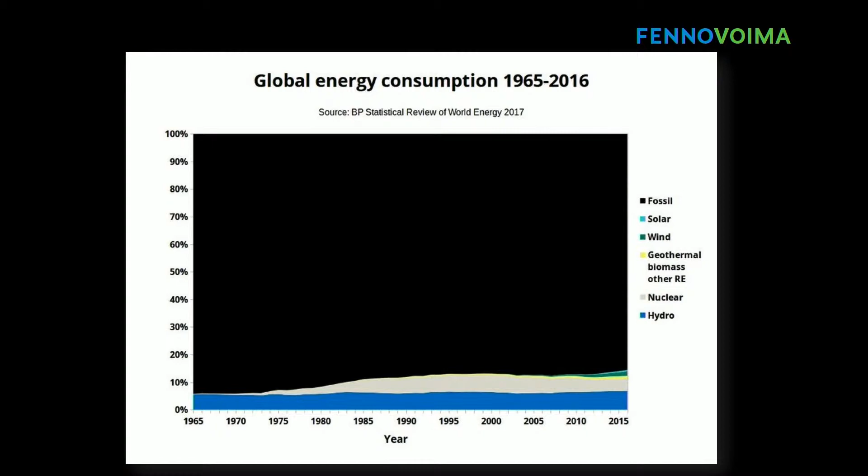Over the last 50 years, the global energy consumption relative trend looks rather sad. The black is really black - the black is fossil. The world's energy, not only electricity but all the different forms of energy we use in the world, is made out of fossil fuels, about 80%. The world-class challenge is to get rid of those fossil energy sources.

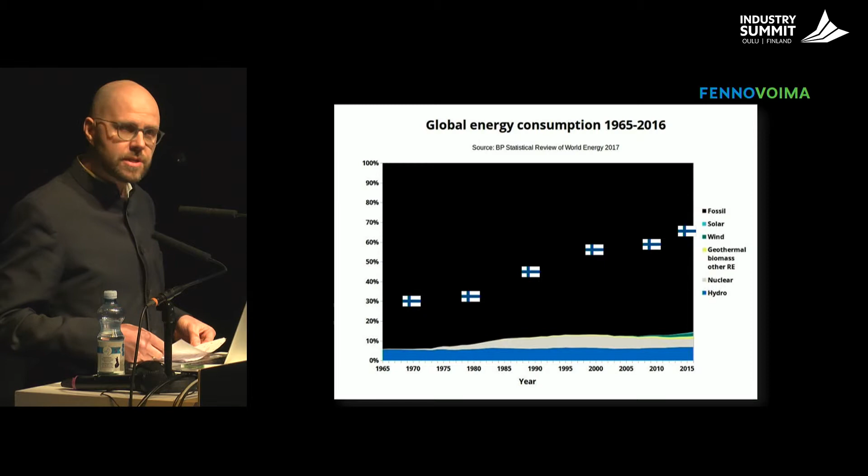But don't you worry, Finnish energy situation has been on a good development track. Here you can see the flags and the levels. We still have some problems with transportation, heating sector, electricity sector, and industry sector as well, in cleaning our energy systems. But the world has much bigger problems than us in Finland.

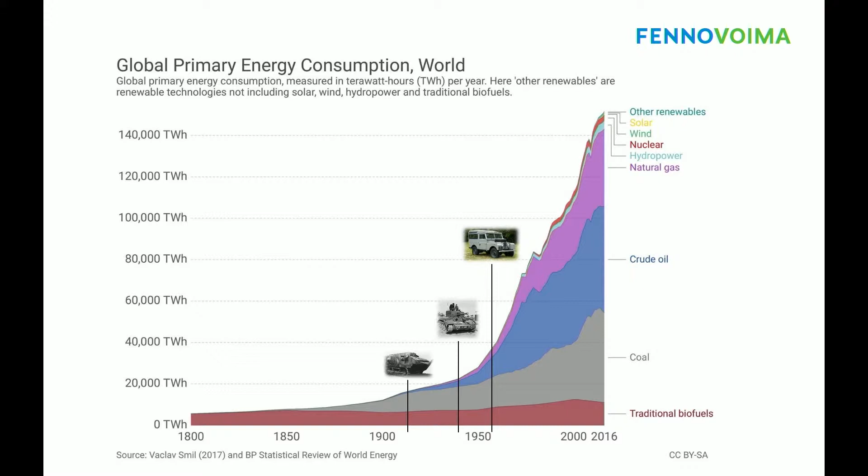This graph shows the absolute development of global energy consumption. As you can see, two world wars were fought mainly with coal. Coal is here, the gray one, 100 years ago.

After my car, my Land Rover, was manufactured in 1956, energy consumption exploded by a factor of 4. Fossil fuels opened the road towards fast technical development and welfare. The amount of population and energy consumption curves look very much alike, by the way. And on the tip of that curve, you can really see hydropower, nuclear, wind, solar - so those guys have a lot to do to replace the fossil sectors.

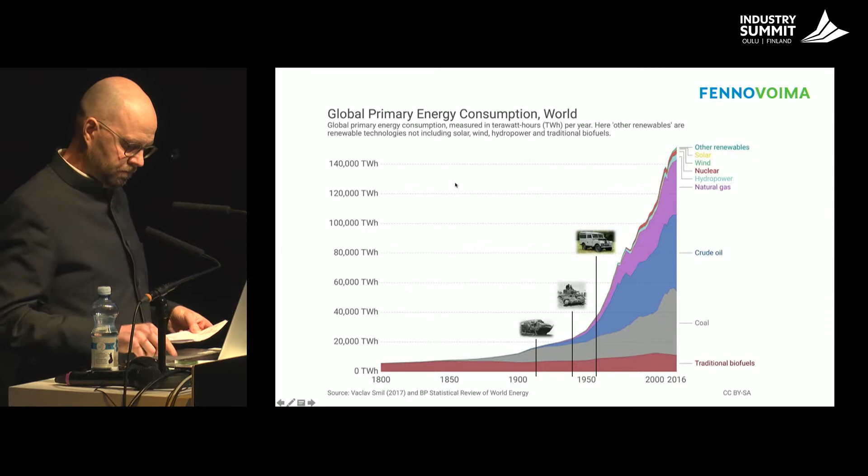The public debate has a tremendous ability to perceive complex topics with black and white colors. Things are either good or bad. The energy sector is complex and there is no fully harmless energy source.

But as we are all quite fond of cherry picking, let's do some cherry picking right now. I would personally prefer my energy being harmless, of course.

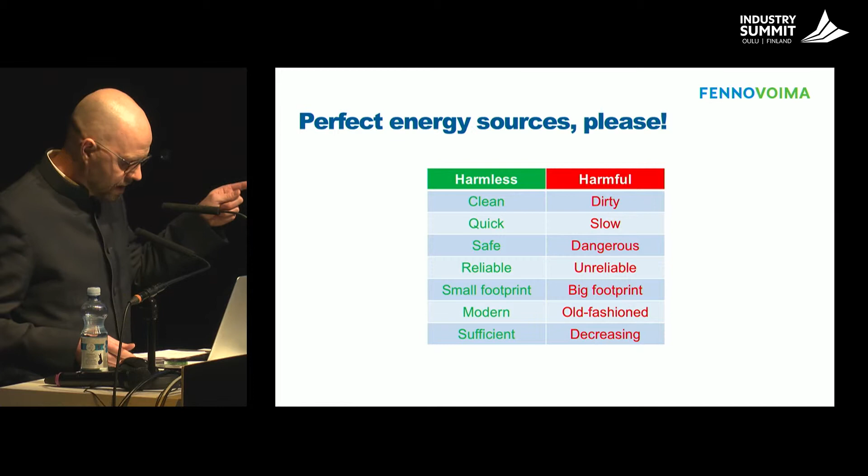As I've been working in the nuclear sector for almost 30 years now, my sector is normally generally considered almost in that red sector. I want you to remember these green words right now. I'll try, within the next 7 slides, to prove that the nuclear sector, as well as all the other clean energy sectors, are on this green side.

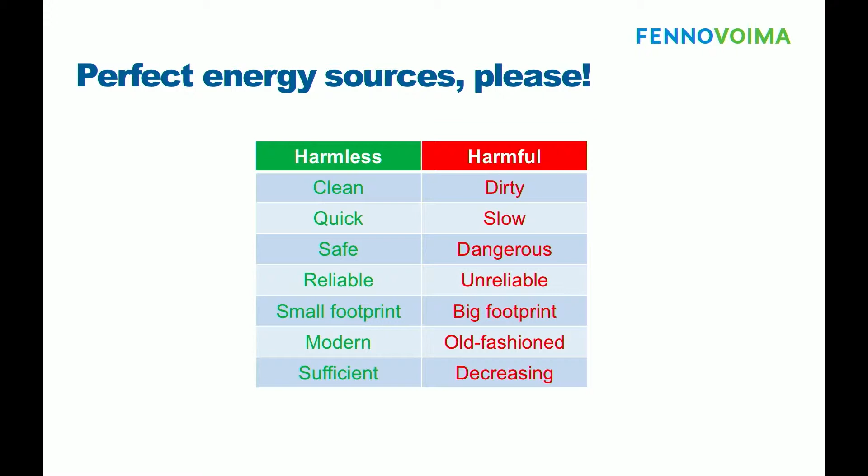First, let's talk about clean energy: life cycle emissions from electricity generation. How clean should the kilowatt hours of electricity we produce be? That's the question in the middle.

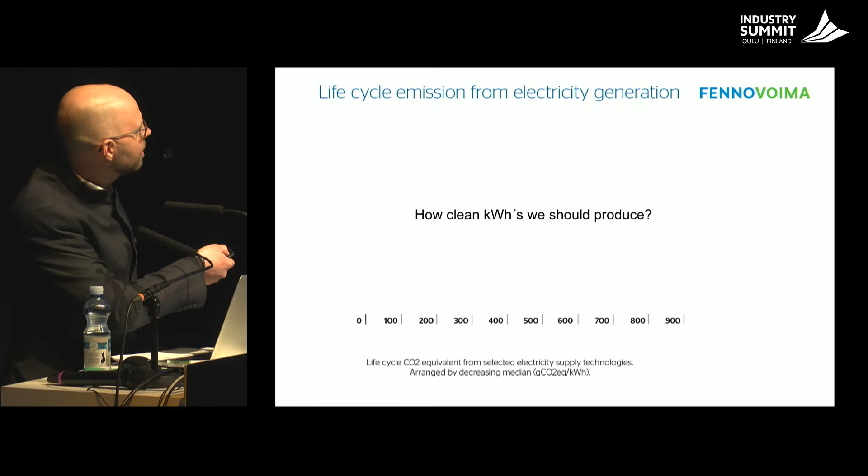Now I want you to raise your hands. There's a scale on the bottom from 0 to 900. Who would be happy to have electricity with emissions of 900 grams per produced kilowatt hour? Raise your hand. No one. How about 500? One person. 200? A few more. 100? Even more. And zero - well, it's impossible, but everybody wants zero emissions.

Okay, coal is a clear winner - coal produces almost 900 grams of CO2 emissions per produced kilowatt hour. Gas is 50% better.

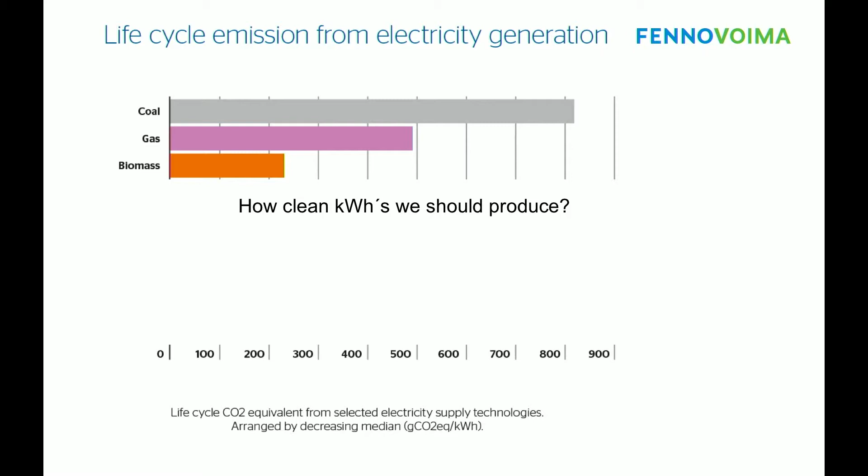Biomass is considered to be a renewable energy source. If biomass can replace these real fossil fuels, that's good. But it's not as good as solar power, hydro, wind, and nuclear. These good guys are all below 100, so they are quite neutral considering CO2 emissions.

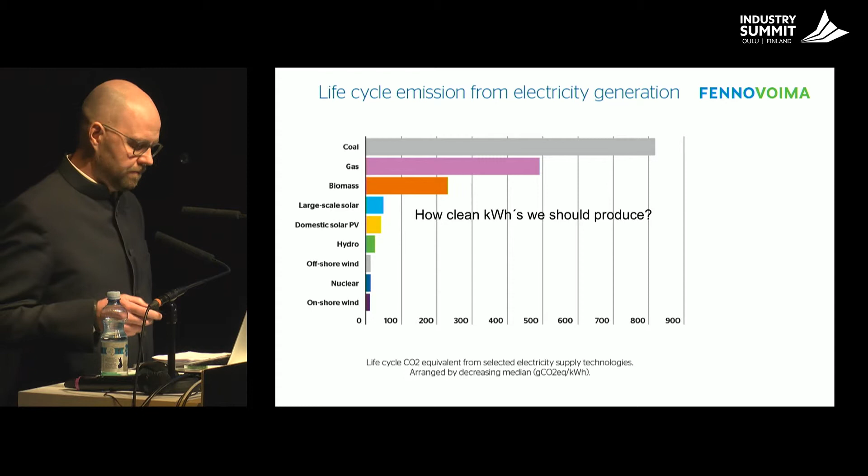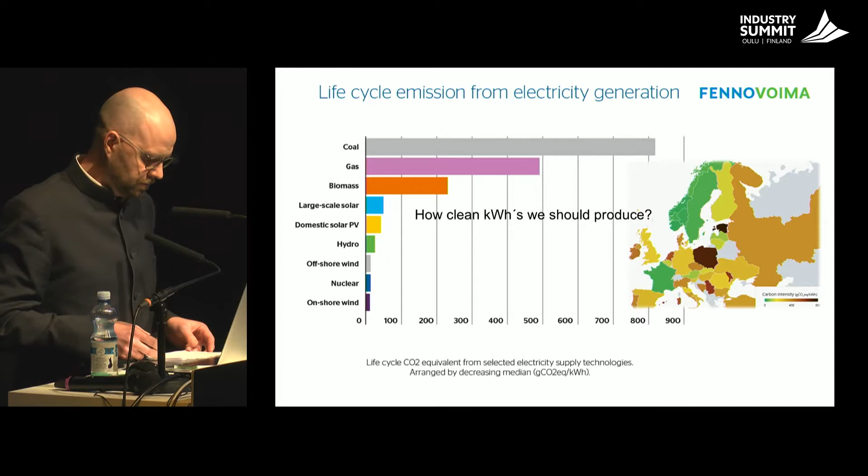The next graph shows the best increase in electricity generation per capita, per person, over a 15-year period of installations. This shows the record rates of adding low carbon energy relative to population, with megawatt hours on the y-axis. Let's see what happens.

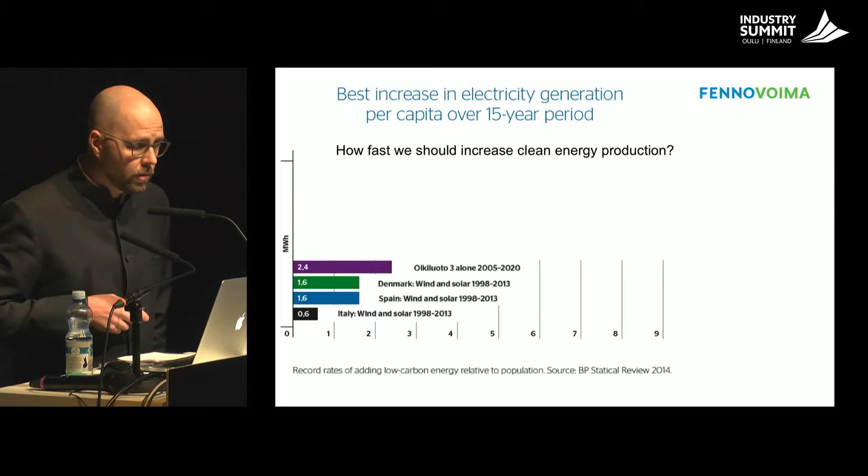Italy built wind and solar from '98 to 2013, within that 15-year period, and increased 0.6 megawatt hours per every Italian person. Well done. Spain, wind and solar, same time frame, did a little bit better. Famous Denmark, wind and solar - 1.6 megawatt hours per every Danish person. Next, Olkiluoto 3 alone gave 2.4 megawatt hours per every Finnish person.

So we can really, if we want to, build and increase clean energy production fast.

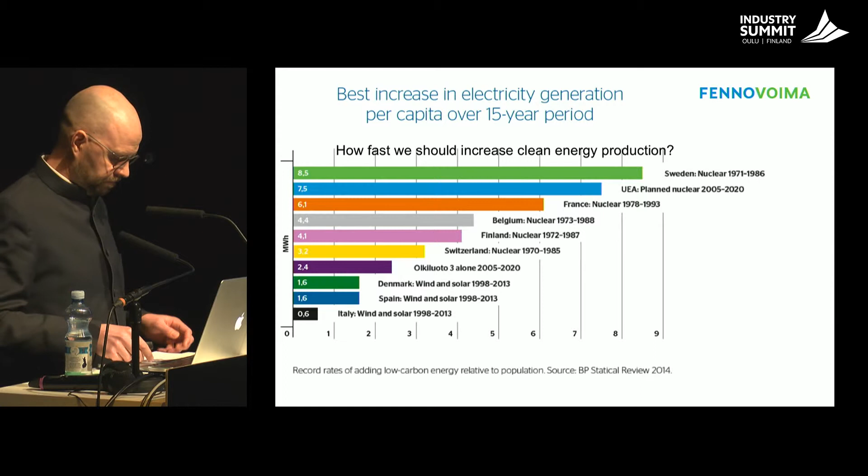The next slide is the most brutal slide of my presentation. How many casualties are acceptable per kilowatt hour? In this graph, we're talking about a larger amount of electricity - terawatt hours. How many deaths per terawatt hour produced by the energy source?

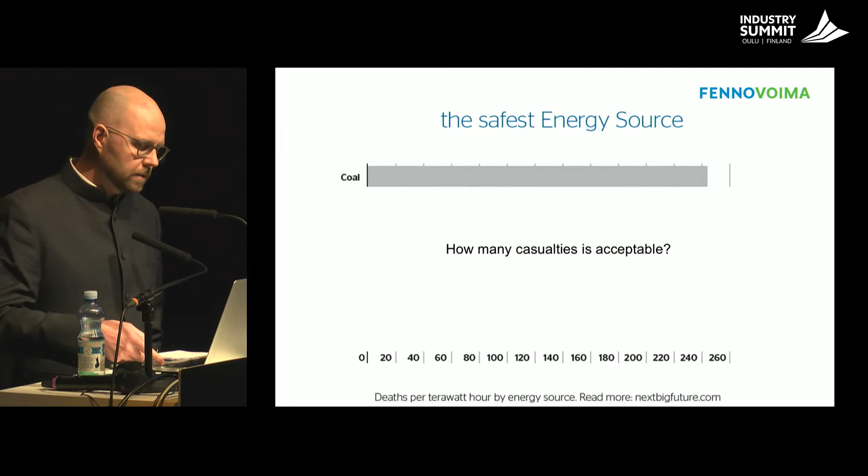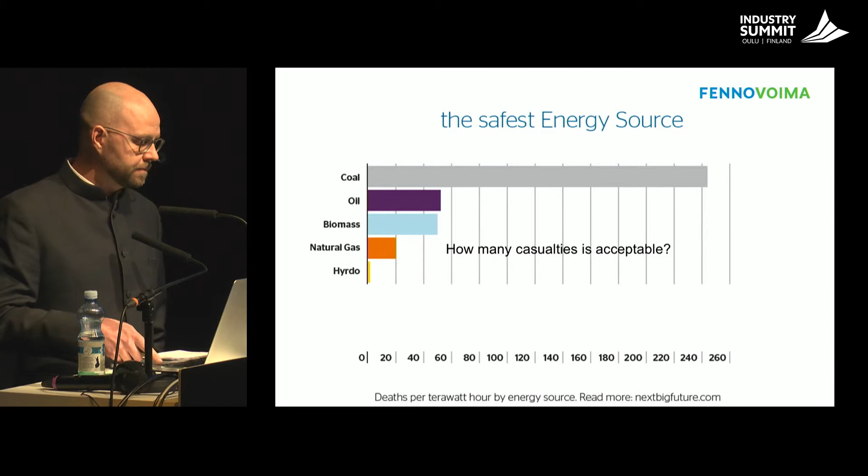The winner again: coal kills 250 people per terawatt hour produced, prematurely killing people. Fossil fuels, biomass at 50, and gas. Then the good sectors: hydro, solar, wind, and nuclear. And I claim now that nuclear is the safest, along with wind power - safest of all for people.

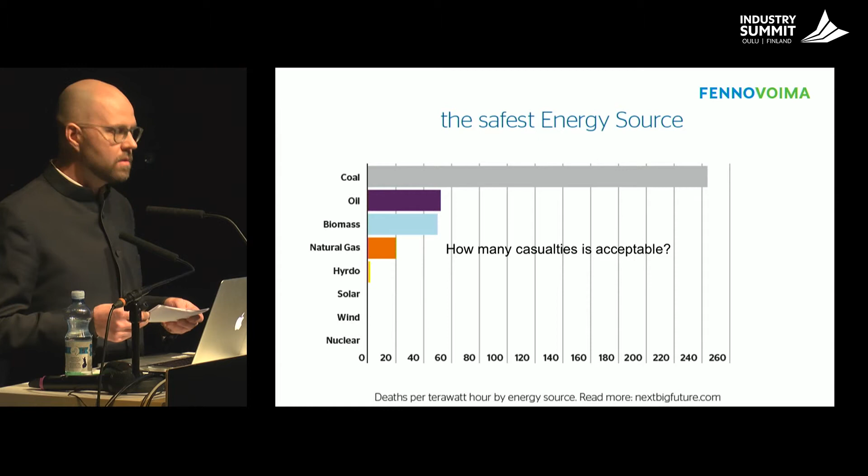For instance, burning coal causes more premature deaths every day than the production of nuclear energy has caused throughout its 65 to 70 years of history. The size of the environmental footprint correlates with the power density, or effectiveness, of the power source.

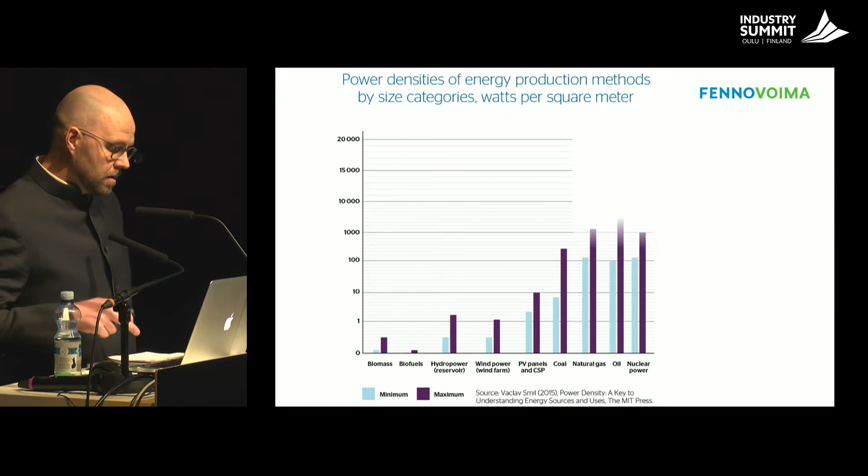Weak energy streams produce 1 watt per square meter. So if you have a hydropower station, which could be 1 square meter, it could produce 1 watt. More dense sources produce up to 1,000 times more. In the end, fossil and nuclear produce 1,000 times more than these weaker streams.

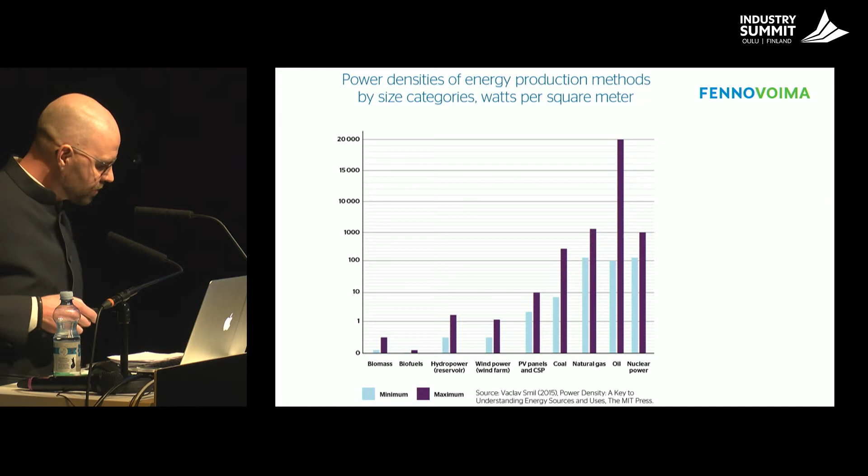In the environment, in nature, the situation could look like this. I have this 1 square kilometer nuclear site 100 kilometers south from here, called Hanhikivi in Pyhäjoki. Once it's completed, it will produce electrical energy equivalent to biofuels planted in a farm field covering almost the total area of the city of Oulu. And all the other sectors are in between.

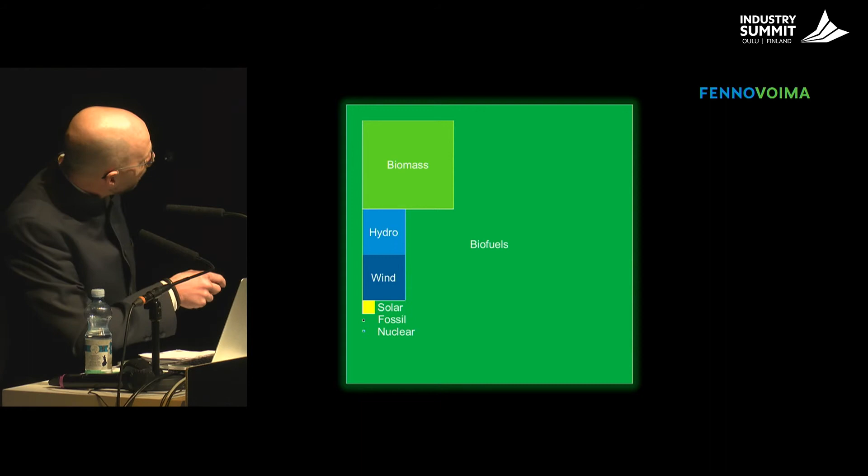Wind parks should be something like 20 by 20 kilometers, or solar even more — many kilometers of land would be needed if we want to produce the same amount of electricity with solar.

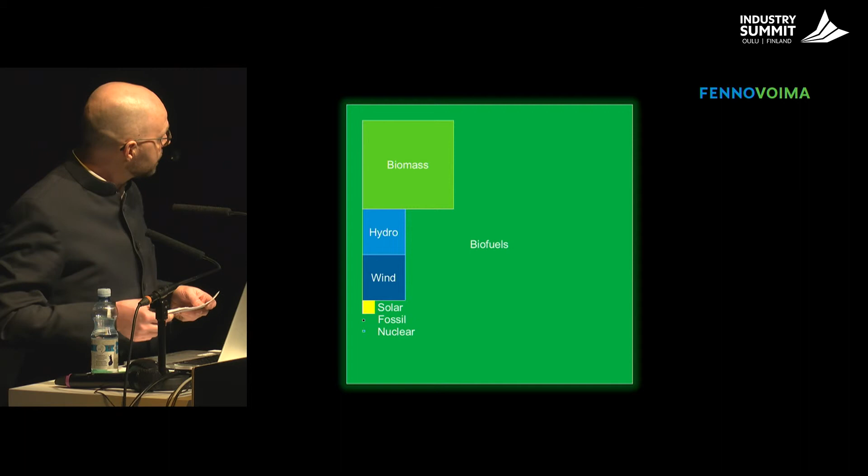The history of nuclear power is as long as my old Land Rover — a bit younger sector than my father, actually. It's 65 years. During that time, nuclear has been able to grow, and it produces almost half of the clean energy produced in Europe.

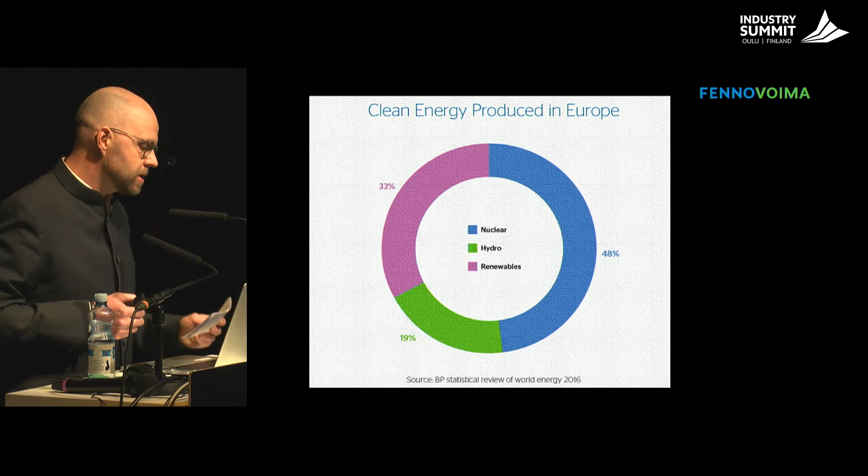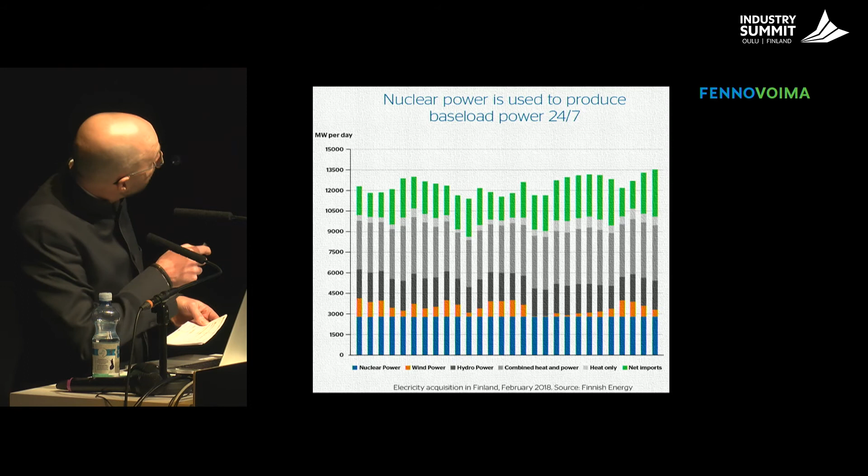Managing variations just in consumption, up here, is easier than managing variations in both consumption and production.

Modern Western lifestyle requires a lot of energy. One Finn needs 5,000 megawatt hours of energy in his or her lifetime. So I have used 3,000 megawatt hours already — I have a bit more than 2,000 megawatt hours left. That means I'm consuming as much as a sauna every day and every night.

This amount of energy, 5,000 megawatt hours, could be produced by operating Hanhikivi 1 nuclear power plant for 4 hours, or 10 hours of the complete Finnish wind power fleet.

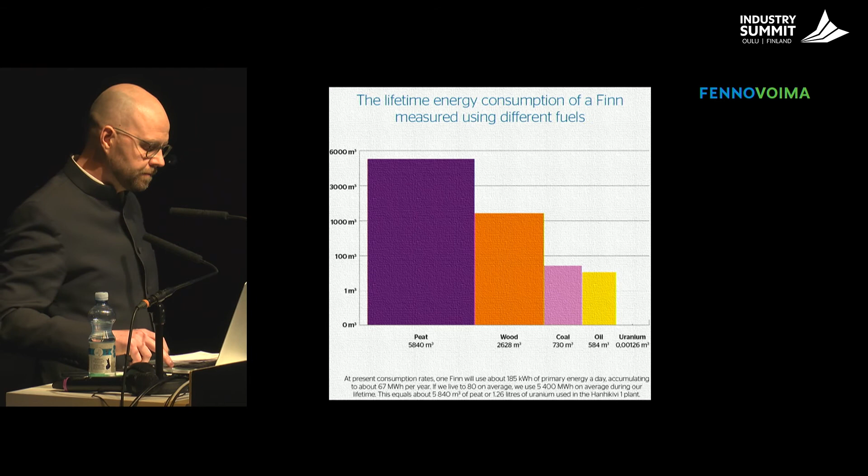But my lifetime energy could also be produced with peat — this heap — wood, fossil, or that little spot there is uranium. It's about 1 liter I would need. You can compare it with this pellet — let's say 100 of these pellets would make it.

In this funny picture from last summer at Helsinki's swimming stadium, peat and wood could be stored in these bigger pools. The fossil fuel can be stored in the kids' pool. And the uranium can easily be stored in a Coke bottle for the whole of my life's energy need.

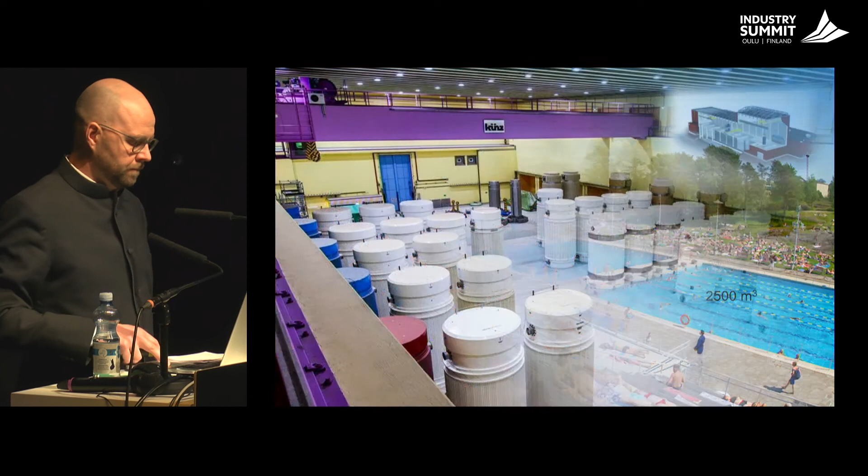As uranium is such a dense and powerful material, the amount of waste produced is considerably low. Easy and safe handling is proven technology.

As you can see here, this is all the waste Switzerland has produced during 40 years. With this amount of uranium fuel, you can produce 15 years of Switzerland's electricity.

All the nuclear waste produced on Olkiluoto Island is stored in underwater pools — you can see the schematic picture of this building in Olkiluoto. All the fuel, or waste, produced there is stored in a building about the size of this particular room.

All the above-mentioned facts and figures have convinced Fennovoima's closest neighbors, 100 kilometers north, even up in Oulu. We have measured local support from the very beginning of the project, 2007, until today. The social license has to be earned every day via good and transparent work and close cooperation with the locals.

And as is normal, nuclear projects are a bit delayed every time, so I'm 7 minutes delayed — I'm sorry. Thank you.